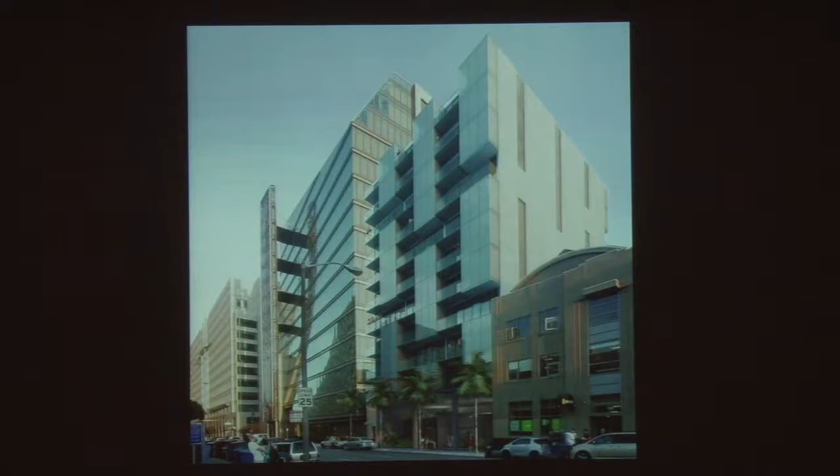At 555 Golden Gate, next to the new PUC building, a white San Francisco high-rise with a garden at grade to commemorate Stars, the famous restaurant that once occupied the site.

Amongst the wedding cake fabric of the Van Ness corridor, 1080 Sutter continues the grain.

On Clara, a SoMa alley, a building which bends to let southern light penetrate.

In Dogpatch, with its big industrial fabric, a small building of pleated bays, both singular and differentiated, which looks away from 3rd Street and opens to the bay.

In the Mission, completing a corner, with the prescribed rear yard incised on the perimeter as a series of courts which increase light exposure.

On Polk Street, punctured windows become projecting balconies.

This urban fabric type, sometimes warehouse, sometimes factory, sometimes loft, now mostly tech startup, is modernized using the same pragmatic structural principles with contemporary materials and means.

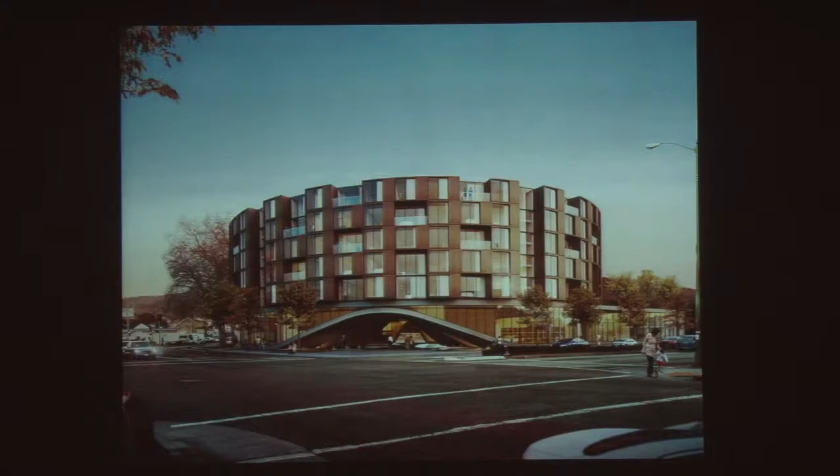In Oakland, a roundabout resolving the radiating avenues in a big O.

In Toronto, a modern city of glass towers.

The tropical modernism of Miami Beach, reinvigorated on two blocks for Waves at 600 Alton Road, with an outdoor shopping court within.

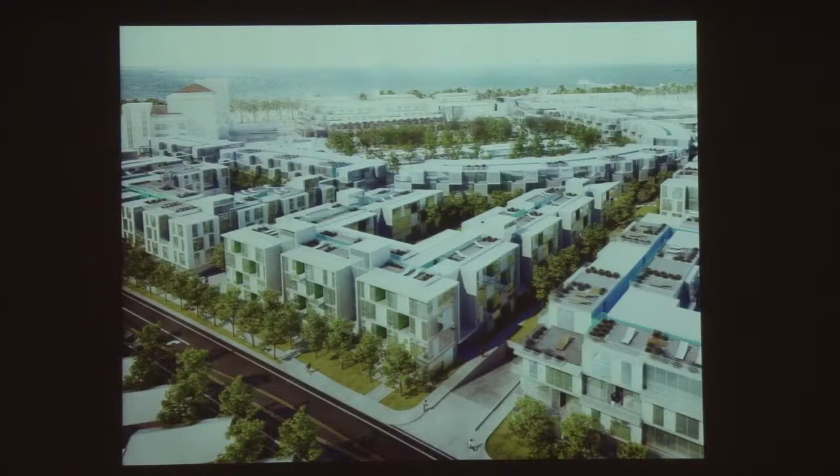Pacific City in Huntington Beach, a seaside town based on ocean Mediterranean instead of the ubiquitous Mission-style red tile roofs which originate in the hills, which are the sort of legislated style of Huntington Beach.

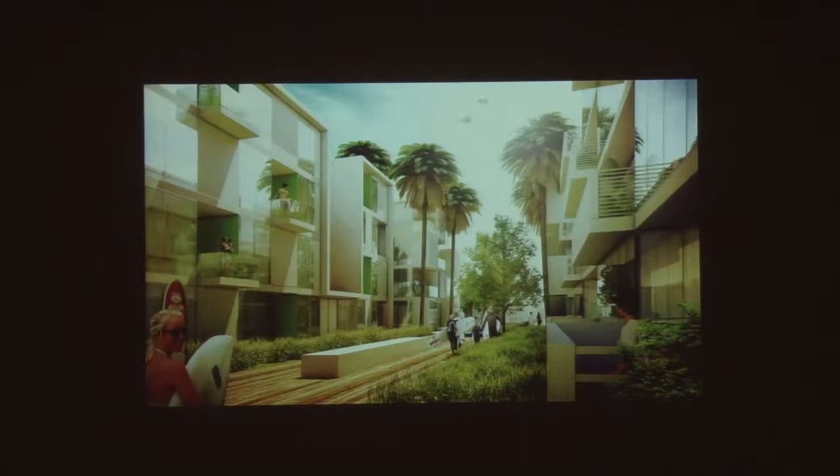But through an education process, I actually got this project entitled through the various bodies by explaining what ocean Mediterranean actually is. This is how we deal with the exteriors of our buildings, where the skin weaves the interior with a specific climate and particular culture of the city.

Our interiors emerge from another set of questions.

Many architects are interested in freedom of expression and design buildings as personal statements. My interest is rather in the freedom of expression of the occupants, in providing opportunities for the people who inhabit buildings.

This calls for forms that are open-ended and ambiguous, abstract and free of agenda, that express their own reality rather than artistic impulse. I'm interested in perceptible process, which is captured in the object and remains part of its experience, like forms in nature.

Architecture has legible intention, articulated in the accumulated language of form. This is sometimes structural, sometimes material, and always spatial.

In the search for the authentic over the image, the actual materials and the systems of assembly, the processes of construction, become the expression. I always see buildings as instruments more than objects, as receptacles for changing events in time, rather than static monuments in space.

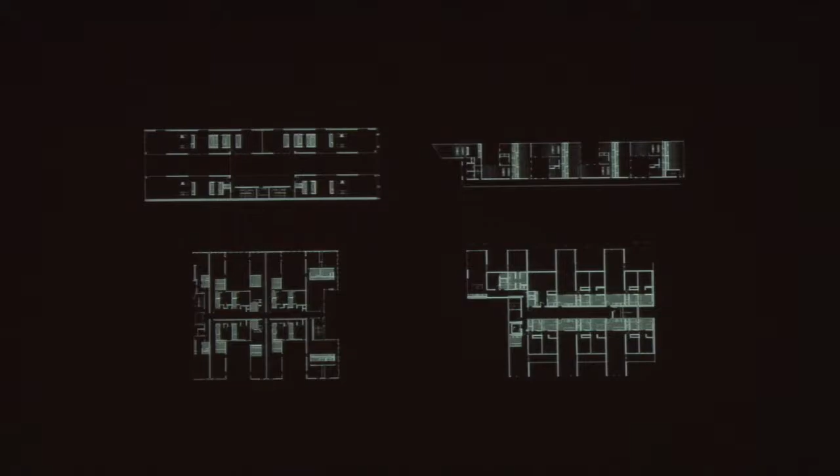I aim to make buildings that facilitate occupancy and appropriation, buildings which are frames rather than pictures, more like a telephone than a conversation, more like a camera than a photograph.

Our work emerges from highly modulated and systematic plans assembled from a catalogue of ideal contemporary types, which are constantly evolving. We use the lessons of mass production, and although there are claims that current technologies will bypass the need for repetition, we've employed the economies of serialization to increase quality.

We've never had any interest in arbitrary variety, preferring to make all units the same and good, and when inhabited, the neutral spaces we provide result in much more differentiation than I could ever imagine.

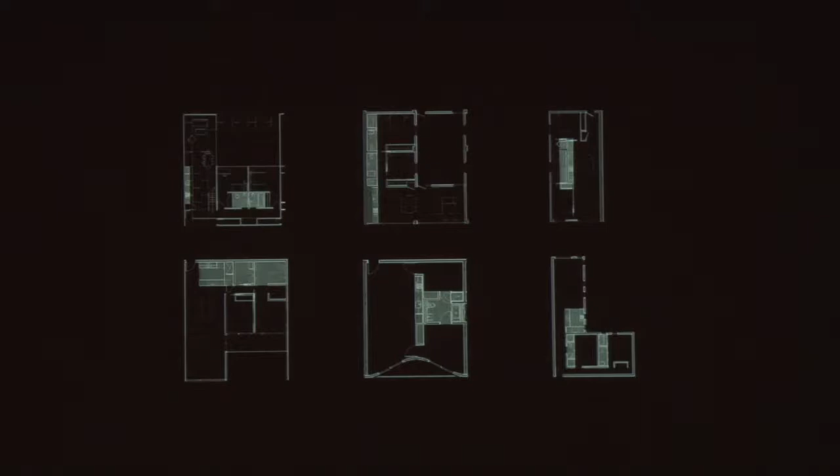In order to provide the maximum indeterminate, deprogrammed space, the service elements—kitchens, bathrooms, storage—are accumulated, collapsed, and minimized. These servant programs are compressed, eliminating the whole idea of rooms, replacing them with minimally differentiated continuous fields of space.

The service elements double as structure and stack vertically. All mechanical, electrical, plumbing, and sprinkler runs chase within these zones. All lighting emanates from these dense areas.

This process of reduction, compression, and repetition provides opportunities for the expansion and reallocation of resources to increase qualities in other elements. Through hierarchical unities, elements are assembled, grouped, and minimized, providing the maximum amount of free space for occupants to determine their own programs.

Buildings become instruments to facilitate rather than objects to admire. They exist in the dimension of time as much as the measure of space.

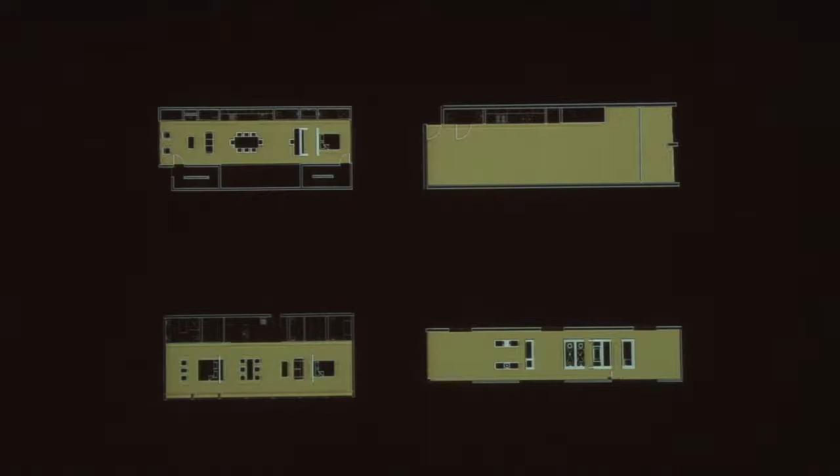From this strategy, we've developed two typical plan types, which we're using in many of our projects today. The first are what we call thickened walls, and the second, pods.

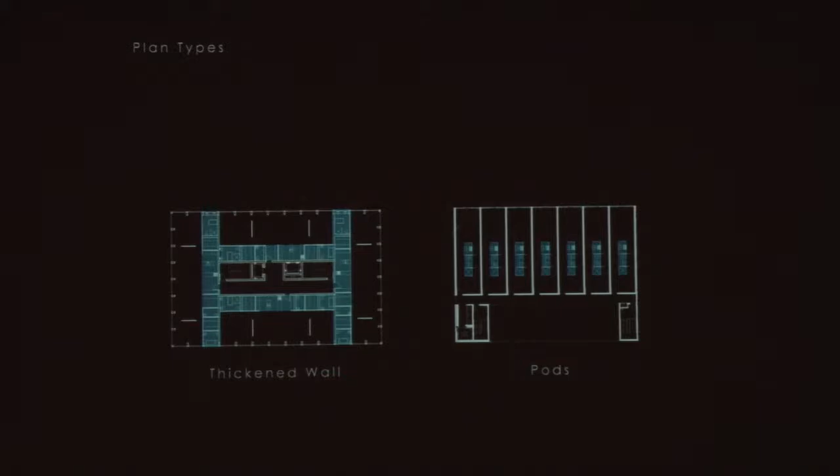These are some examples of thickened walls where all the mechanics and program have been collapsed into a zone—here a 4-foot zone, here an 8-foot zone, and here another 8-foot zone—leaving a free space which can be carved in a sort of indeterminate way through the process. Here you see the operation of this strategy where all the mechanics are in this zone, leaving this zone entirely free, and where the program is determined by the placing of furniture.

This is another example of the same idea of a thickened wall, and here the idea of buildings that exist in the dimension of time, where the master bedroom becomes connected almost in a loft-like way with the rest of the apartment through the sliding of these simple patio doors. And here are the bathroom elements.

Another example of this idea of thickened wall and free space in an 8-foot dimension with kitchen, washer, dryer, closet, and bathroom. And another example of a similar type of space.

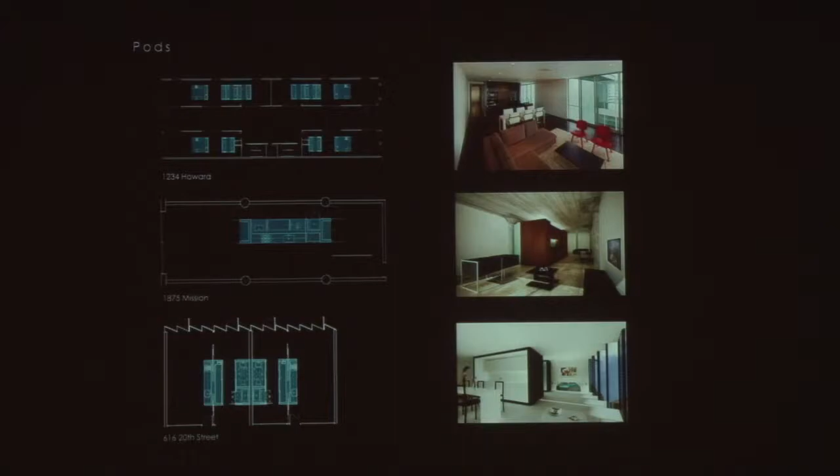This is a series of examples of how the pod idea has been interpreted. Here you see on one side of a pod floating in a field of space, a kitchen, and on the other side, a bathroom, which looks like this inside of it. Here a pod, which is a single element of furniture, is the entire mechanism of domestic life—a kitchen, storage, and a bathroom. And the location of this pod in this field of space creates opportunities for program like a bedroom, a dining room, and a living room.

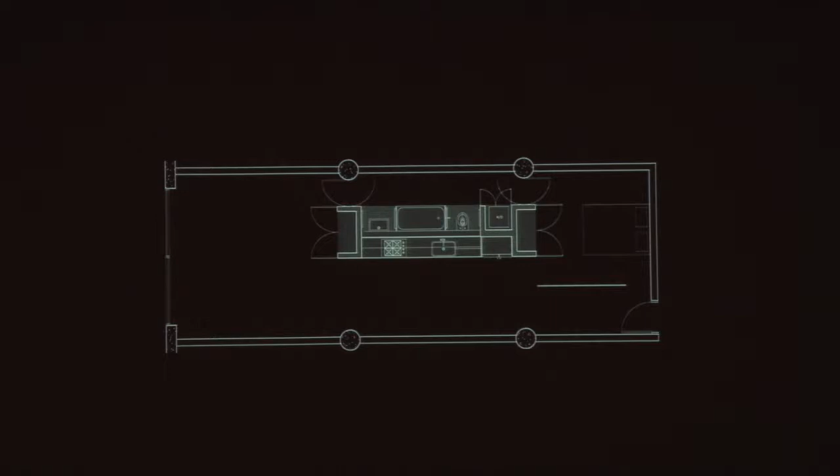And these, we're actually experimenting now in Cleveland with pre-manufacturing and slipping into a building like a piece of furniture. This is the bathroom side where the splash of the kitchen is glass, so you're getting daylight into this, which is often in dense housing conditions a dark sort of element.

And here you can see the same pod idea in a project in San Francisco, and here the opening of this field of space into a single kind of loft, or the shutting down into a two-bedroom apartment. And again, the opening and closing of this.

This is standing inside the bathroom area of the pod, closing the door, and someone walks by in the bedroom. Here the bathroom opens and the accessible part of the bathroom is shared. The turning radius of the accessible part of the bathroom is also a passage, and then closing it again.

So with that as the background of the work, I wanted to show you a few specific projects from recent work. This is 8 Octavia, which is at a really interesting moment of arrival in San Francisco, where the 101 ends and becomes part of the city grid—this is Octavia Boulevard. So this project is in a way a gateway, an entry point to the city, and it was important for me to think about the way this could introduce people to the San Francisco of today, the San Francisco that's more about the iPhone than the Victorian.

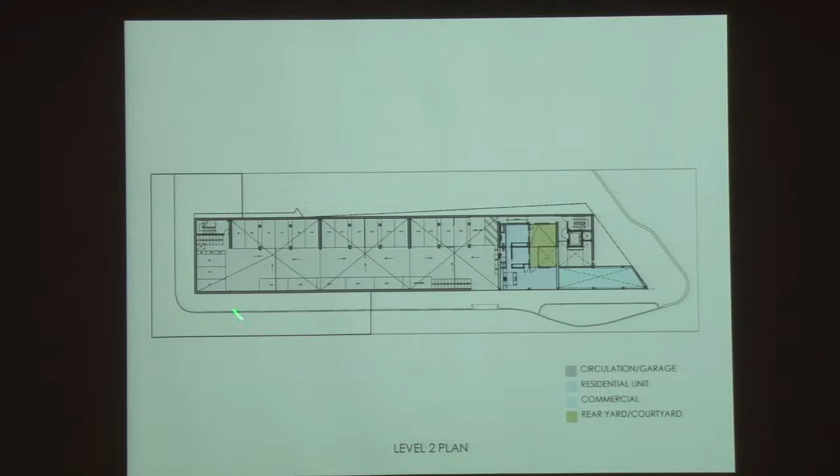And then the building, as you arrive in the hallways, and the sort of structuring of the building with these L-shaped units and I-shaped units. This is the thickened wall type, this the pod type.

And the way that then these wrap around these courtyards and then flip-flop to create a series of outdoor spaces, rooftops, and a kind of more complex idea of a vertical yard. And then again, flip-flop again, and then end up on the roof. So these are those slits that are the rear yard that are folded through the building.

This is a typical two-bedroom unit with this whole set of mechanisms compacted into the most finite zone, and this being a much more open-ended and interpretable area of space. And that's the presence of that unit, the dining area, the kitchen, the thickened wall with bathroom and storage, and then the way that this wall operates as a sort of machine to become an instrument.

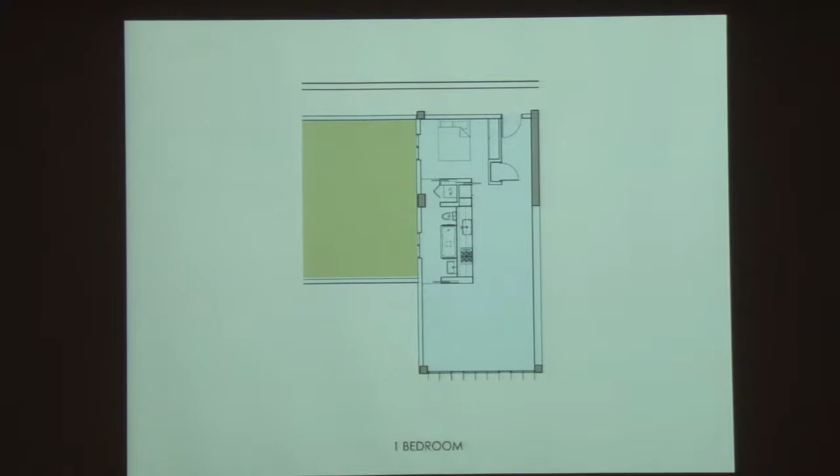Here the pod element, and here you see the pod, which is conceived as a piece of furniture, but was actually site constructed in this particular case. And the way that it appears from the bedroom side.

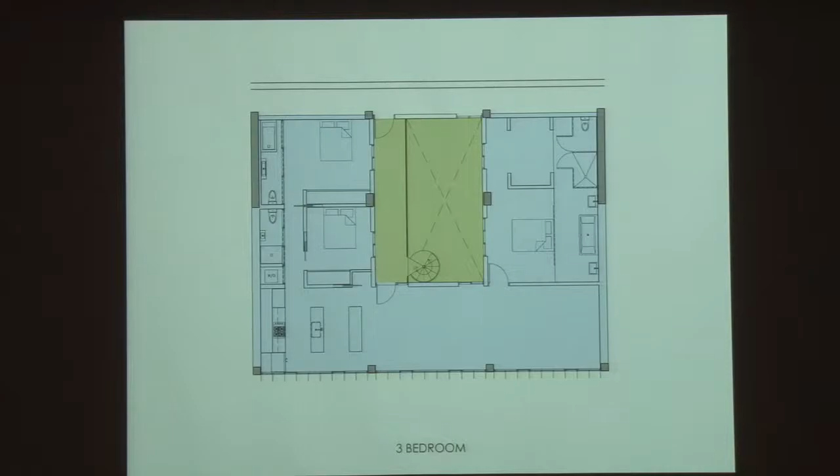These are just some of the other units, and at the top of the building, these three-story units which take the two building blocks of the L and the I and unify them into a sort of great room, a master suite, and then the standard two bedrooms, and have their own rooftop access through these spiral stairs.

This is one of those units. It's a 54-foot long room, and the master bedroom where the bed would go over here with the bathroom arrayed behind this glass screen, and the dressing area over there.

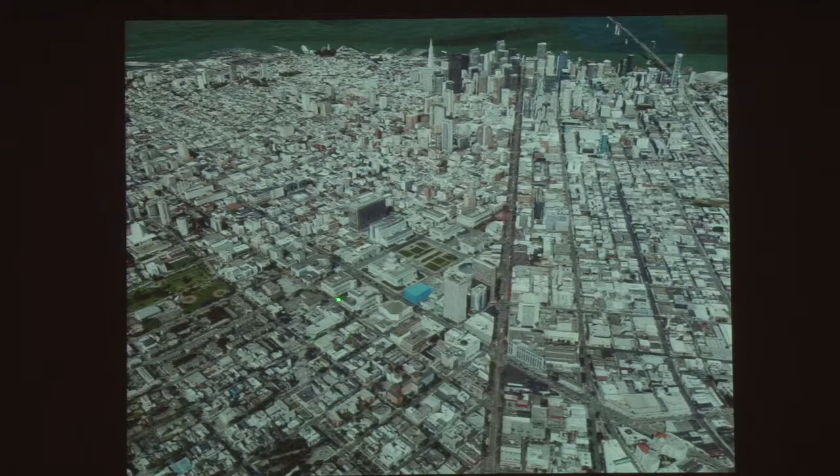This is a site in the Civic Center area of San Francisco, which is probably the most architectural moment of the city, where all these beautiful Beaux-Arts buildings cluster around a park. And so quite a challenging opportunity to build in the presence of such strong architectural influence.

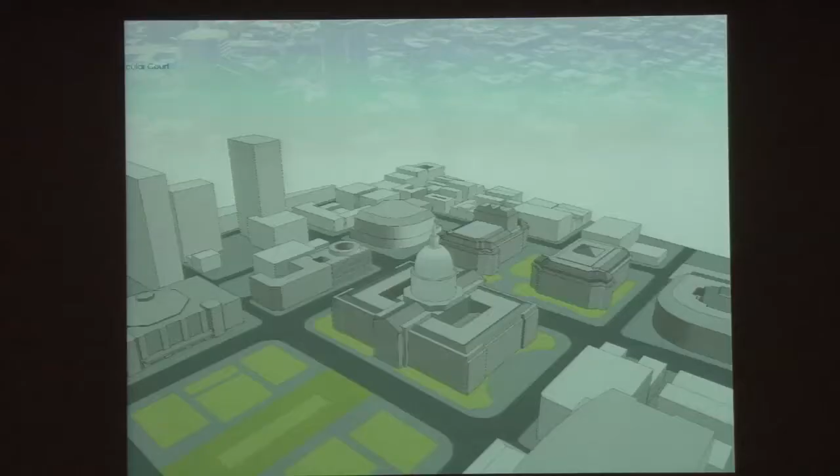One of the early observations was that all of these buildings are actually arranged around quite strong central courts. So I decided to use the same organizational device for my building. And because, again, there's this requirement of a rear yard, this is essentially the rear yard of the building, which is open to the sky and which the building is organized around.

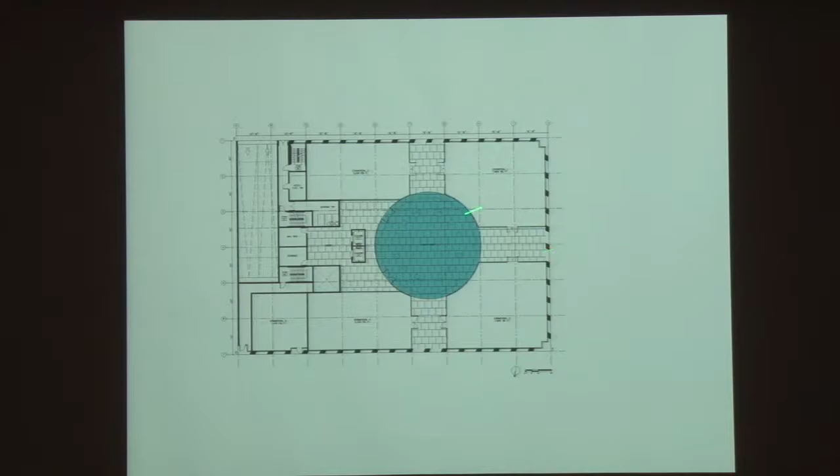So this is the plan of City Hall, and then this is the plan of my project at ground level with a cross-axis and a series of commercial spaces. The dome of City Hall and the rear yard of my building, where this is the access corridors to the units themselves, and it's open to the sky.

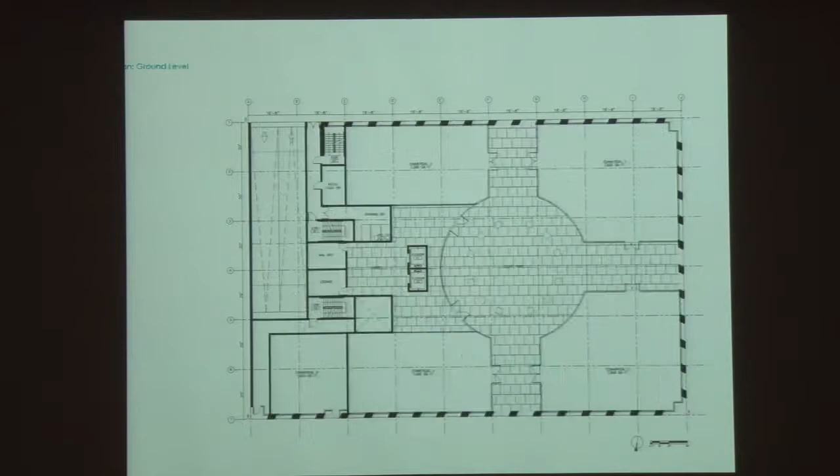So a very cautious and careful analysis of all the elements of these buildings to try to create something which is both of our time and respectful of the world that it finds itself in.

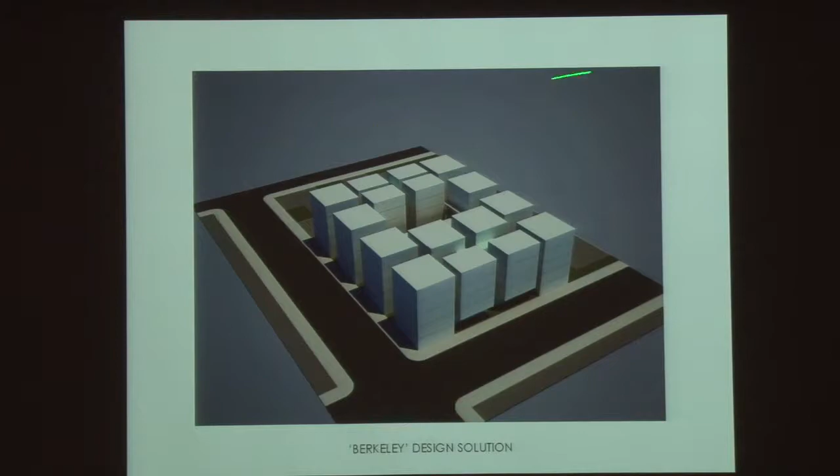So my approach was instead to do what we ended up calling the garden village, which is a series of buildings linked by outdoor space in a continuous green setting. This is actually a pre-manufactured modular project, and believe it or not, it's actually being made. I know these things have been dreams for the last 100 years, but we are actually doing this. So there are two modules.

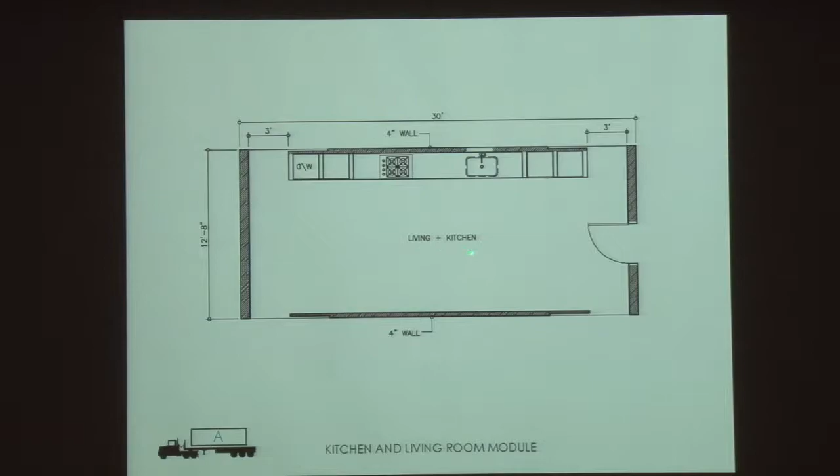This is the A module, which is basically living room, dining room, kitchen, and this is the B module, which is a bathroom and 2 bedrooms. So the standard 4-bedroom student unit is an accumulation of 1 A module and 2 B modules, which are slid together and then stacked on top of each other and around the site.

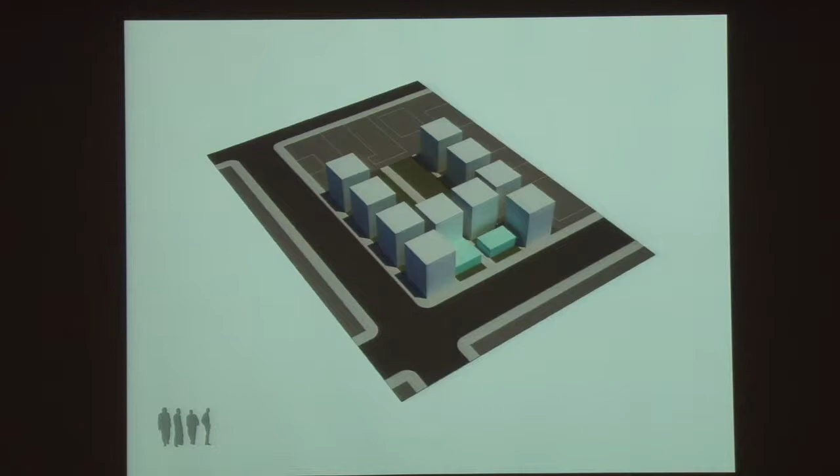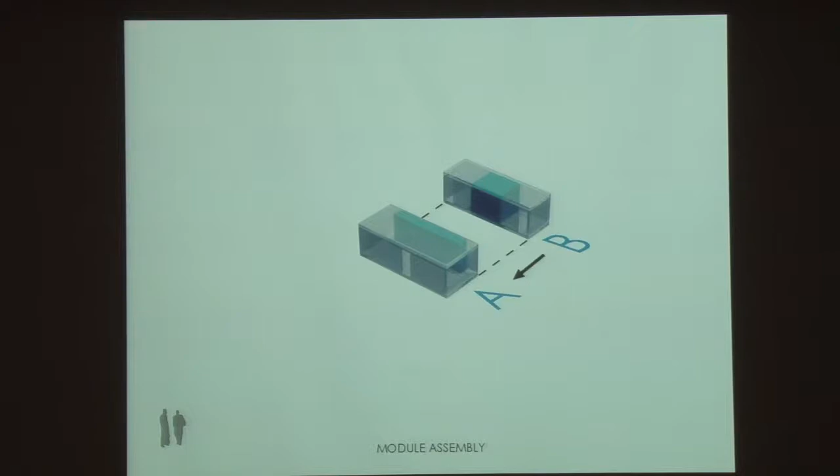And then we also have some more luxurious units, which are basically 2-bedroom units, one A module and one B module put together, then stacked in the same way to fill out the rest of the site.

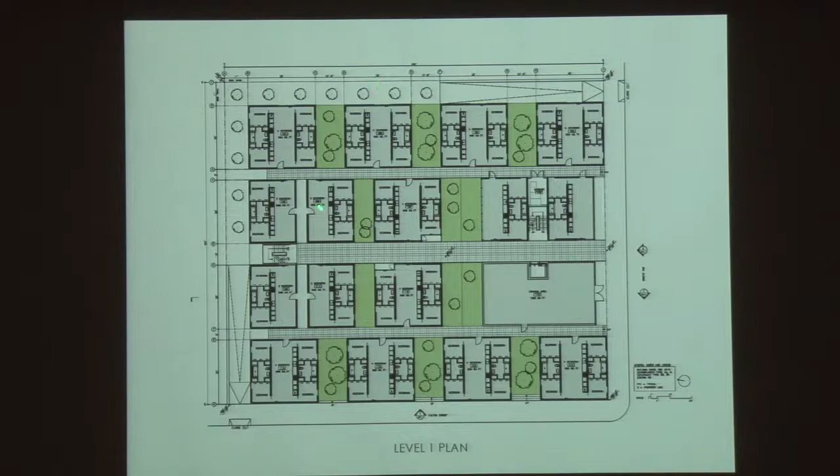Then there's an independent walkway system which links all of these little towers together, made out of bar grating. And here you see the site plan, so you see how the texture of Berkeley is maintained, and the idea of a village where it serves 2 purposes. One is to provide enough exterior girth to have light for all these bedrooms, which student housing demands. The other is to create buffers for sound and also to create this sense of living in a village.

And so these are the plans as you go up. This is the texture of Garden Village and the texture of Berkeley, so that it's quite continuous with the fabric of the town, and just some views of it as you drive up Dwight and as you come down Fulton Street.

And just the idea of these open walkways, which are the access to the towers of student houses, and the character of this village, which have these green spaces and connective tissue for student life. This is a rooftop outdoor area, which is a common area for the project, and one of the gardens, and just again views of the street.

This is the factory in Lathrop where the modules are being made, and it's a wonderful process actually, because unlike construction, this is a manufactured product. So there's no dirt and waste, and the labor that actually produces these buildings doesn't necessarily have to be skilled construction workers. The workers are essentially people who know how to make things. So it's a manufacturing process versus a construction process. It's sort of cleaner than the garage where I take my car. And so this is actually how these things are being made.

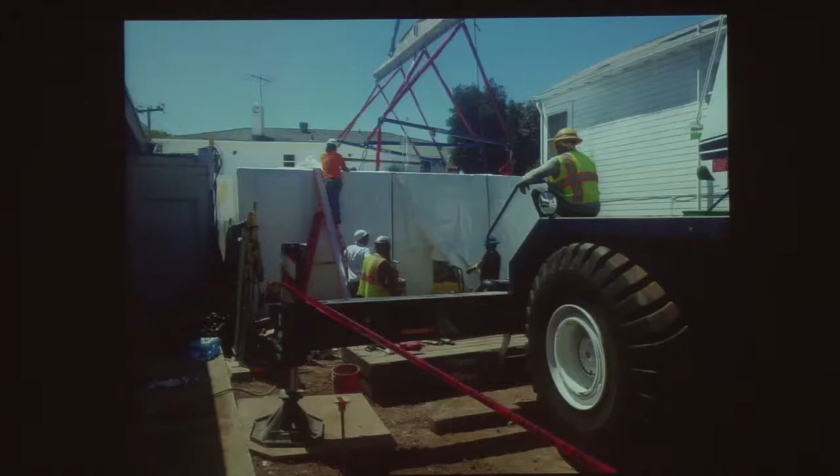This is a prototype that we built in Oakland to test the sort of difficulties there are in building buildings with very large pieces like this. So here you see the modules being stacked, and here you see the building finished. It's 5 units of this type.

This is the way the modules arrive from the factory. All you need to do is go to the grocery store and stock up the fridge, and you're ready to go. Or just put your towels on. The tiling, everything's done in the factory, and it's really nice quality as well. So it's quite an amazing operation.

And so here we are at Dwight. The site's been demolished. The basement, which is for the mechanical systems, is under construction, and the modules are being produced in the factory and will arrive soon.

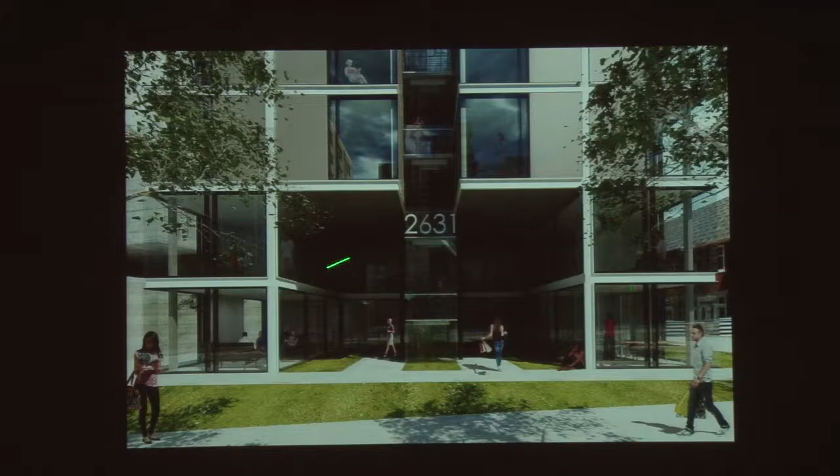Up the street in Berkeley, I'm working on a project next to the University Art Museum, on this site over here. Again, student housing, and the sort of main public gesture is this porch, which is a semi-public element. There's a lounge for the students and a management office.

The concept for the project was pretty much the idea of inventing an urban architecture which would create a kind of district architecture, modeled on great cities like Paris and London.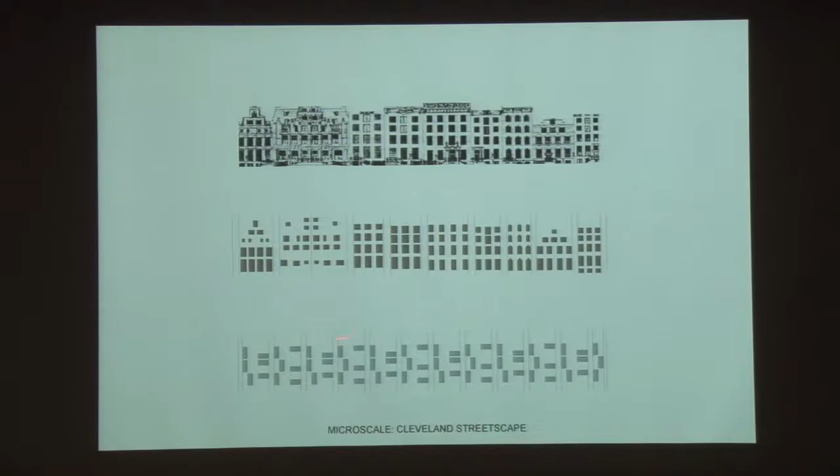So we began with a kind of analysis of the fabric of the downtown architecture and also the neighborhood architecture that's in the direct area of our site, and eventually developed a language for the exteriors of our buildings, which you see over here, which is a combination of an idea about a townhouse, the continuous fabric building.

So this is the sort of result of the architectural language that we invented, and the way that the language is a continuation and interpretation of the historic condition. This is the kind of threading of existing fabric together, existing street structure.

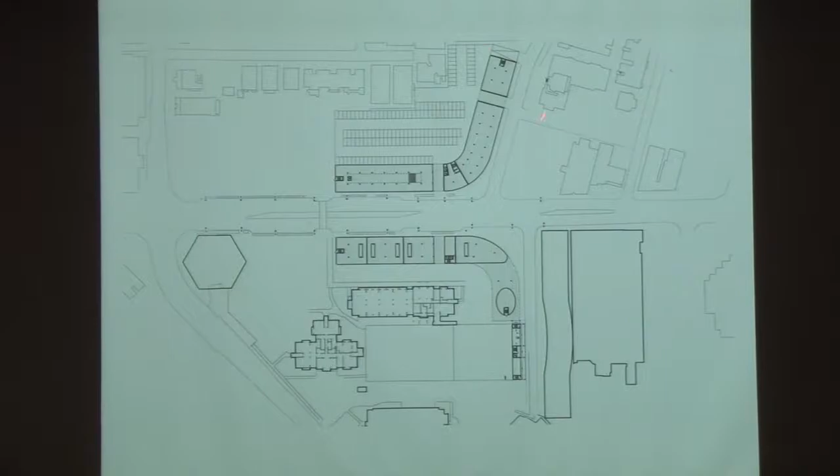The project is based on a sort of thickened wall idea with these continuous service zones and a double-loaded corridor, and then these continuous free zones which are carved up in different ways.

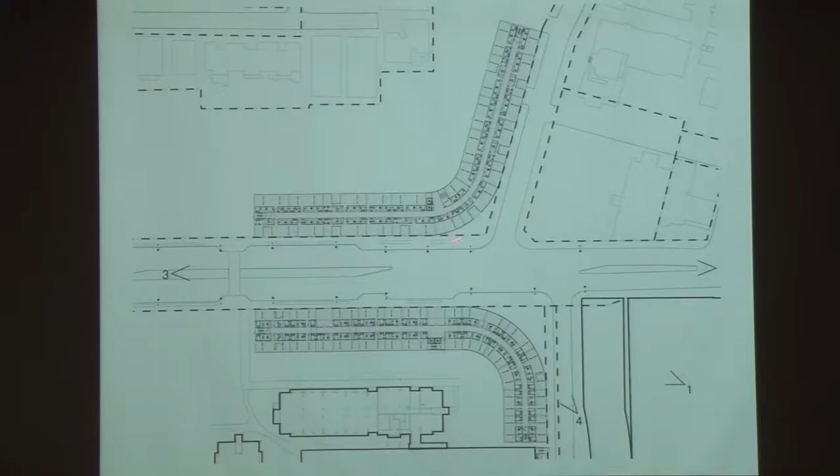This building carved into smaller units to house mainly a student population, and this building more market rate population for Case University. These are for Cleveland Clinic.

These are the different unit types, but there are quite a few more. But I mean, it just shows you the general strategy, and I'll show you more about that.

So this is then the sort of threading and weaving of existing and new, and the sort of creation of this town, uptown. This is phase 2 now.

The success of phase 1 gave everyone confidence to double the scale in phase 2, and phase 3 and 4 will be even bigger. So I was stuck with a difficult problem because I'd already built these buildings, and I had to figure out a way to both double them and continue them. So this is the result of that.

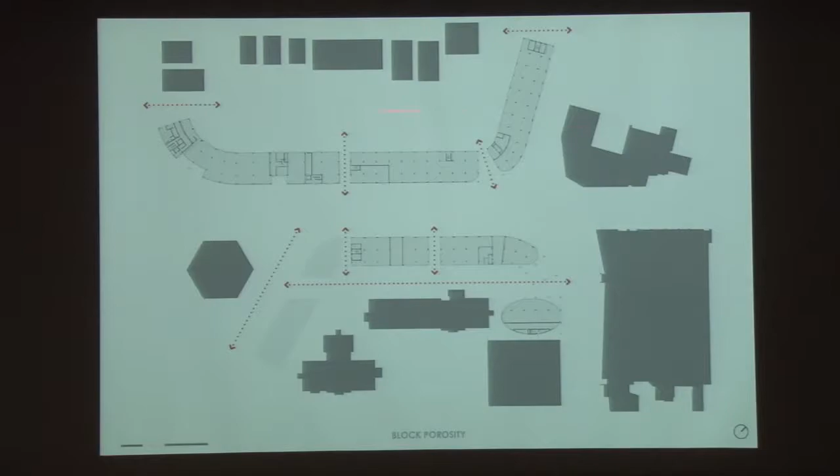And this sort of concept of gateways which connect through. We also made a hole in this existing building to connect to this parking lot and this courtyard behind here. So this threads through from our building to the rear yard and a residential neighborhood. This is a link between the two art institutions and so on. So these were the key things, this sort of urban idea.

The whole ground of the building is both transparent but also glass, so that it creates a sort of sense of floating, open publicness. And then there are the gateways, which do actually link through in various places.

These are semi-public areas in the buildings themselves, which are sort of eyes on the street as well as gathering places. I'll show you something of them.

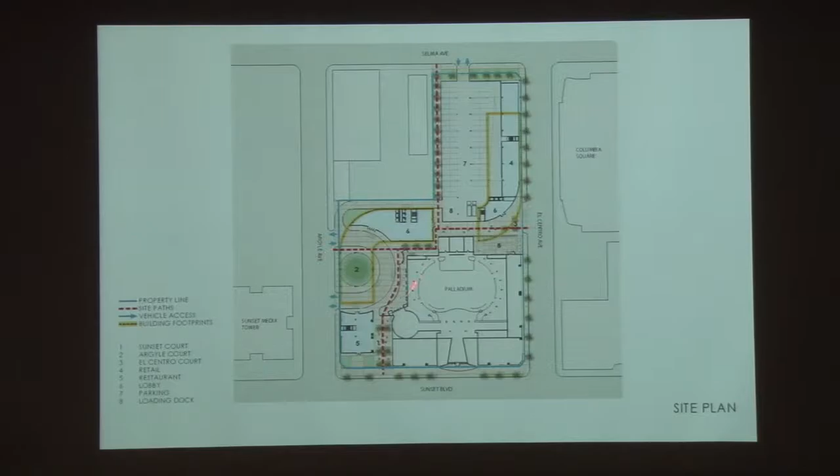So here you see the sort of construction of an urban precinct in a parking lot. This building today floats with cars all around it, and this is a creation of a precinct for it with a courtyard, another courtyard, and the entries, and a major automotive arrival point around the existing canopy.

Oh no, that's which way?

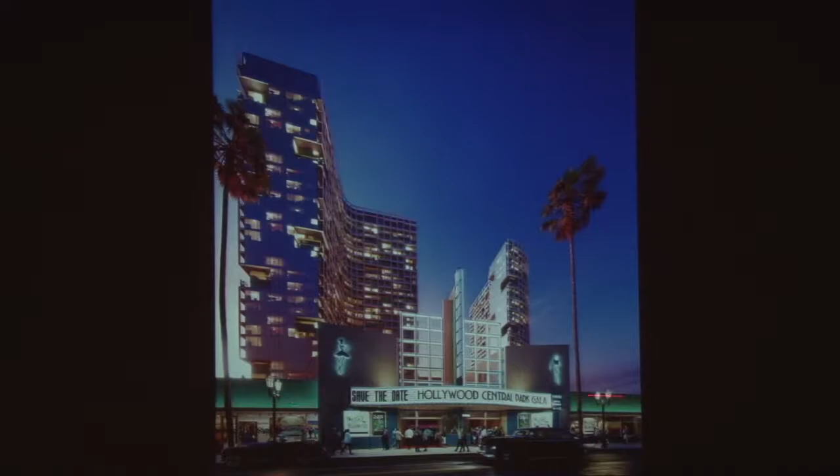So these are just some of the images. This is again the same strategy of thickened walls and different unit types, with images of this lattice work of balconies and screening that becomes the front of the building, and views of the old and new—a recreation of a more intense, dense urban life that will reinvigorate what's a little seedy right now, as it is today.

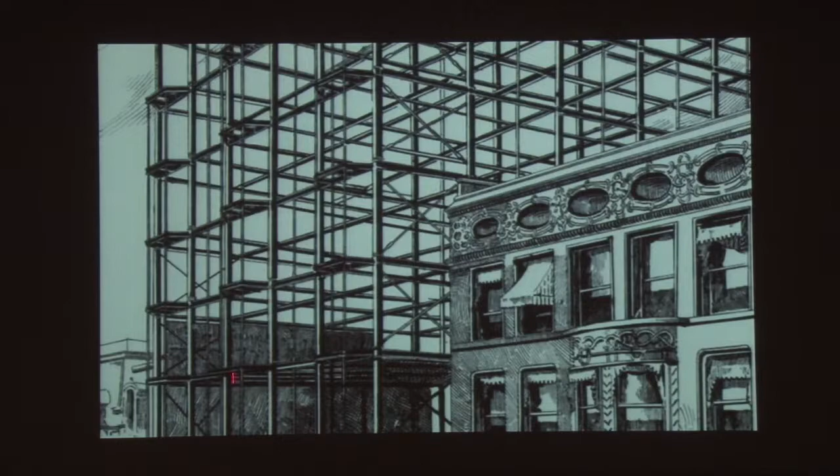This is Chicago, and working in Chicago is an amazing opportunity because it's the city where modernism was actually invented. It's almost like what Florence is for the Renaissance, Chicago is for modernism. It's a city of grids both horizontally and vertically, where the frame was first developed as a pragmatic way to stack things, but later by people like Mies was turned into a form of architectural expression and a language.

So the idea for the building was really a palimpsest, to create an object which would somehow collapse all of this history into a single building. This was the operation of building it out of the history and lessons of Chicago. Here you see the building—it's at the corner of Roosevelt and Michigan, on the South Side, at the opposite end of Grant Park, a kind of bookend to this amazing open space.

One of the interests I had very early on in Chicago, after looking at Aqua with its nice Miami-type balconies that are just thrown out into the wind, was to make a building that would actually be usable in that climate.

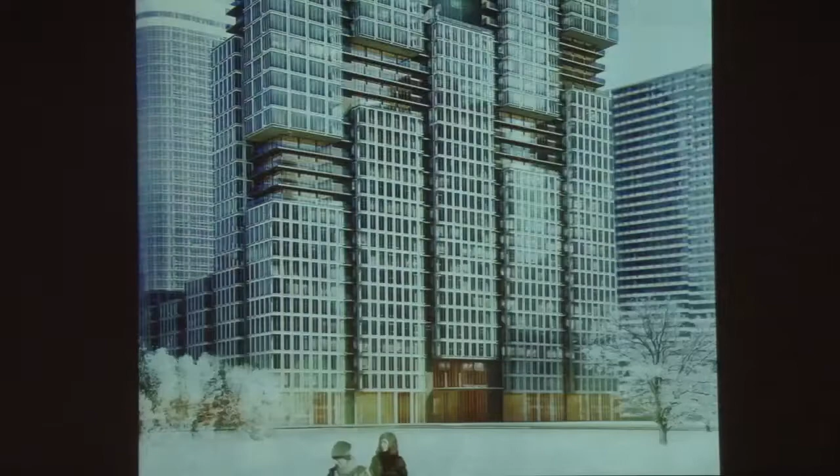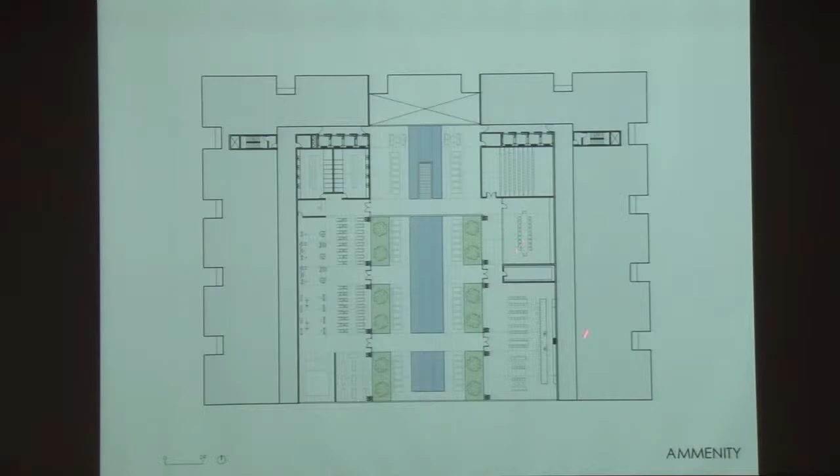So this is the entry to the building, where you walk into a sort of vertical lake and walk through the lake to a massive amenity zone, which is almost like a resort.

Here you see all of the vertical distribution of the building, the elevators and stairs. This is all the wet services of the building. This is all the indeterminate space, and these are the recessed balconies—it's very rigorously based on the same traditions.

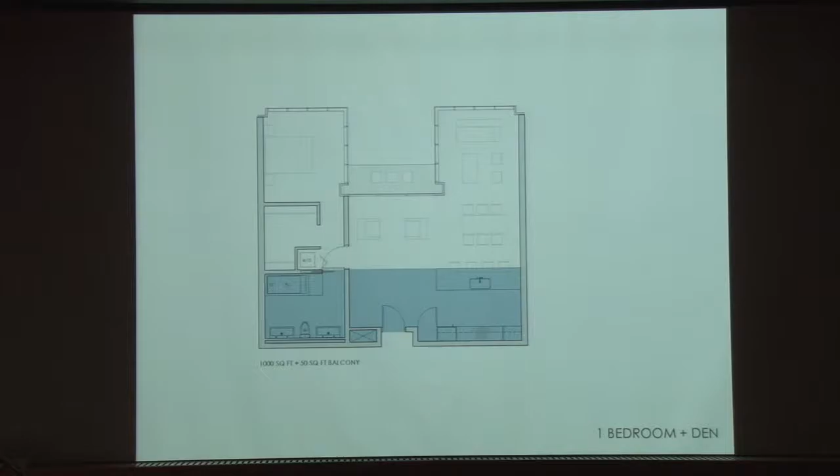Here you see the way the system actually works to make decisions about different types of units. One of the things that's always difficult with development is finding the right mix, and often it has to get deferred quite late in the project. This method of systemic rigor allows that to be done late in the game.

And this is just some views of the building.

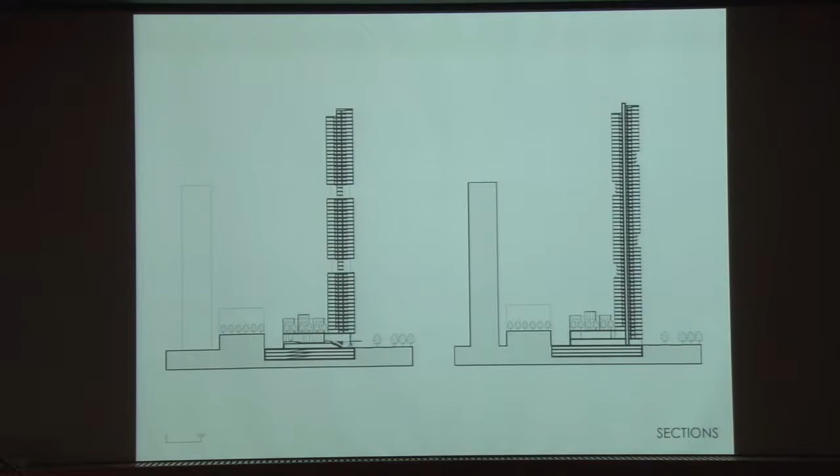I wanted to show a few of the other project types that we're working on. Like most small offices, we began with single-family houses, and it's something we're still engaged in.

This is a house in San Anselmo for one of the people from Apple. It was a really complicated site with sloping areas right at the end of the development of Sleepy Hollow. The only way that seemed feasible to build on a site like this was to actually create our own site—so we built a bridge which contains the program of the house.

On the lower level are all the bedrooms, and on the upper level is a big loft-like family and formal area, plus a guest house and garage.

The site itself is quite intricate, with two scales—the village scale of Sleepy Hollow and then a big public land area—so the section actually accommodates and opens up to those places.

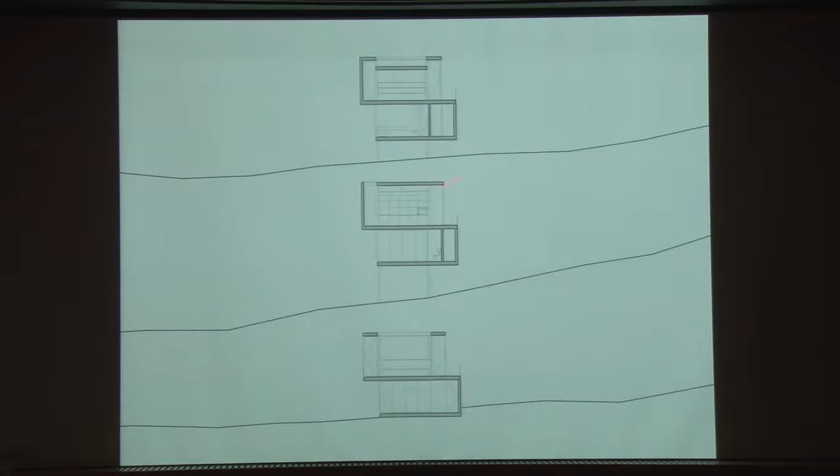So this is the bridge spanning across, creating a new kind of landscape for the house to occupy. This is the arrival into a courtyard, which then leads to the front door, and another courtyard which leads out at the other end to a swimming pool.

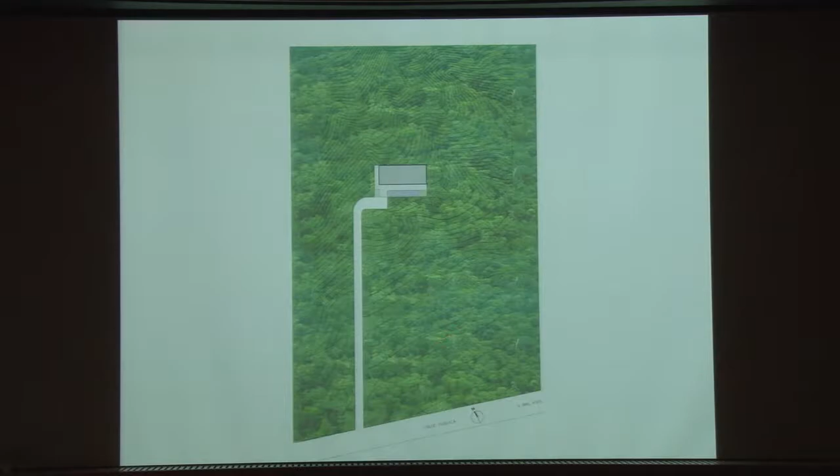This is a house in Costa Rica, basically a vacation house. When the occupants are in San Francisco, the house has to be shut down and secured very rigorously. It's in a beautiful jungle with wild fruit trees and monkeys swinging around—it's actually like a paradise. The house itself doesn't have any glazing.

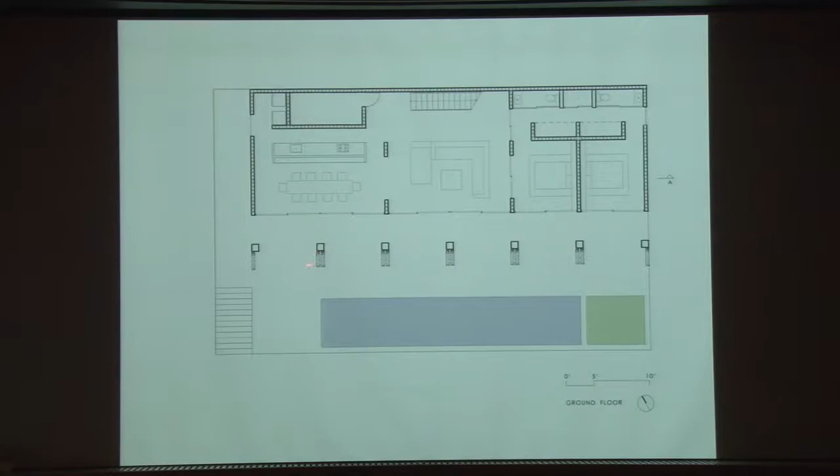There's a very interesting, different kind of technology used to build there—masonry and concrete, which I very much enjoyed working with, as well as steel fabricating, which was part of a tradition I saw all over in San Jose.

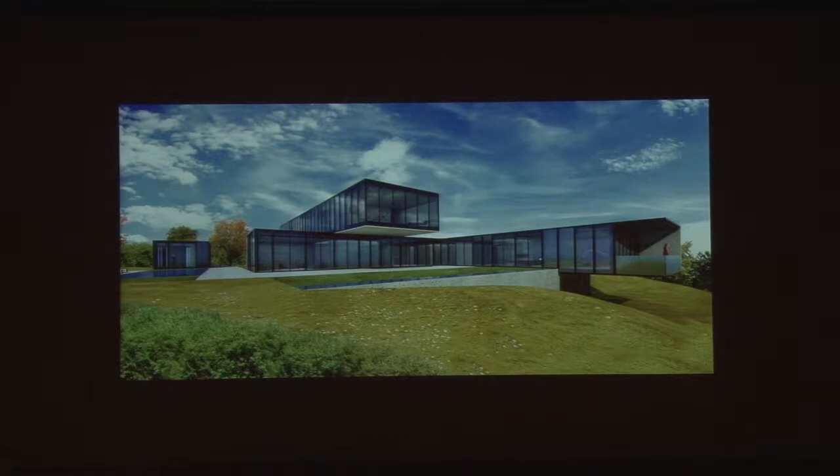This is a house under construction in Atherton. It's a 17,000 square foot house for some very low number Google people. The part that connects to the cul-de-sac, which is the arrival, is all pretty solid, and then the rest of the house is entirely glass and opens up to the views.

It's quite a beautiful site with amazing views of San Francisco, and it's basically oriented and pointing toward them. This is the arrival, and then the open part that looks at the views, and it stacks in the landscape like that. These are the main program elements: the garage, pool, and pool house, along with some views of the building.

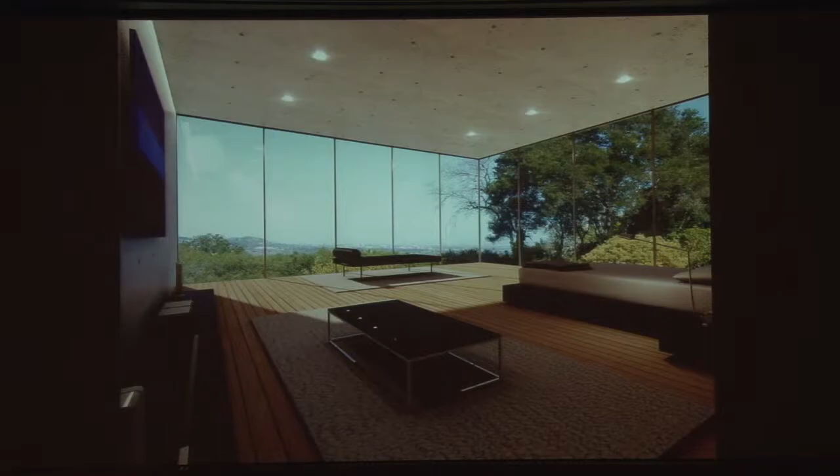It's all poured-in-place concrete, glass, and steel. This is a mock-up of the concrete—we have real concrete artists working with us. And this is the actual construction.

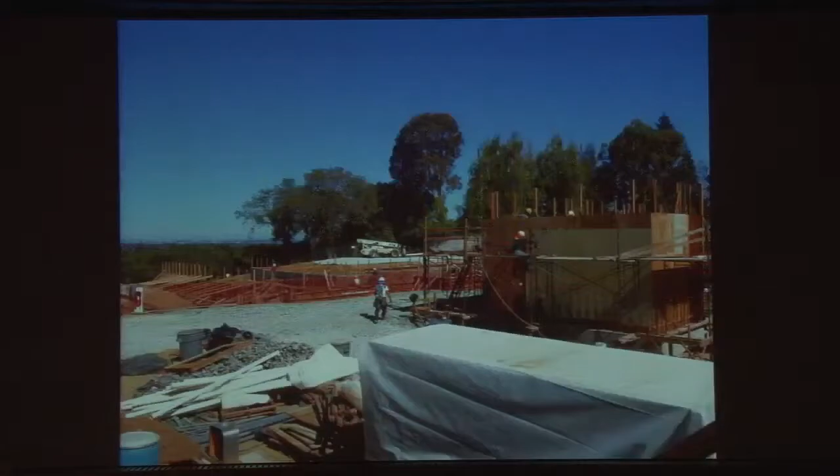This is a synagogue in San Francisco, for a conservative congregation. The most important aspect of conservative Judaism is that they've integrated the services for men and women. Traditionally, women didn't participate in the services, and the whole evolution of this design actually emerged from that fact.

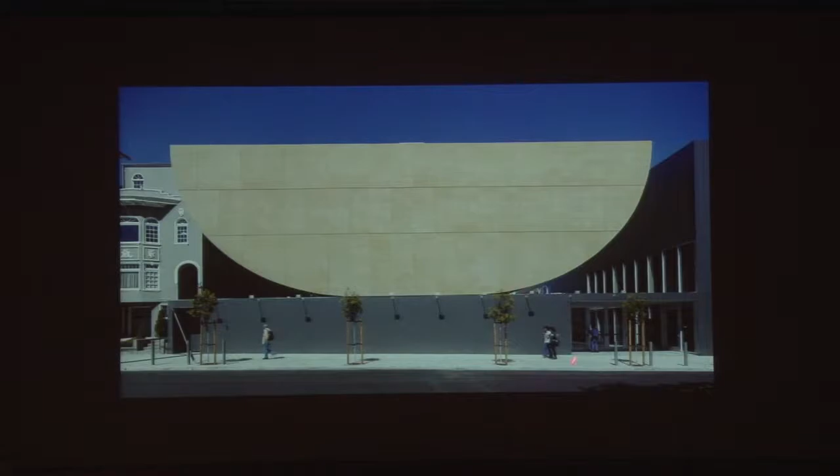Being in a city, the arrival and the transition into the building becomes very important. So it's pretty much cut off, with a series of courts that bring you to the worship space—a way of moving from the everyday to the more sacred. The exterior and the imagery is a memory of the most holy place for Jews, the Western Wall.

In Jerusalem—this is the arrival into a courtyard, up a staircase, where you look back at the city, and arrive in yet another courtyard which links the social hall, a school, and the sanctuary itself.

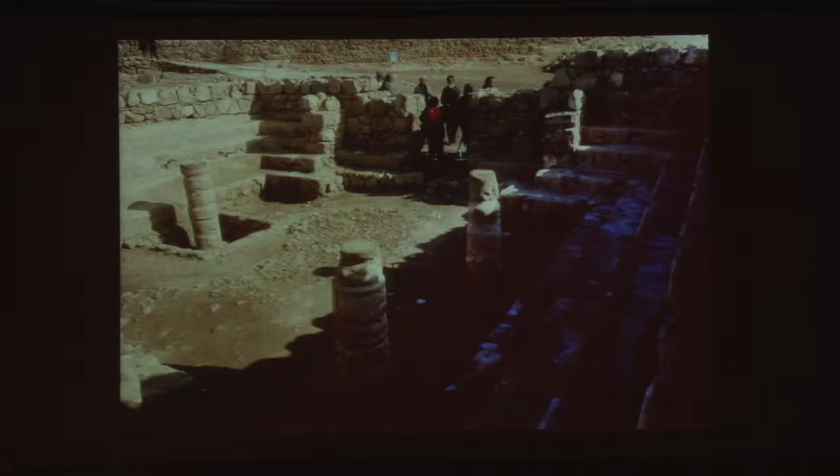The origins and beginning of thought for this building is actually from Masada, the most ancient synagogue, based on a Roman kind of format, and I used this as the starting point for the design.

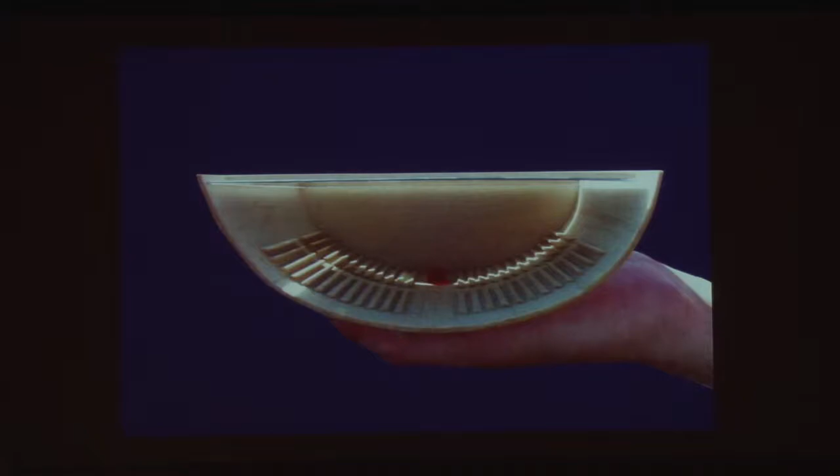So this is the bowl where traditionally women worshippers were in balconies and cut off, but here everyone's in a single space, all focused on the center, which is where the service is conducted—very much like the small ancient synagogues.

One of the interesting aspects of Judaism is that ornament is forbidden—it's basically considered idolatry. So the way the space is actually decorated is with light.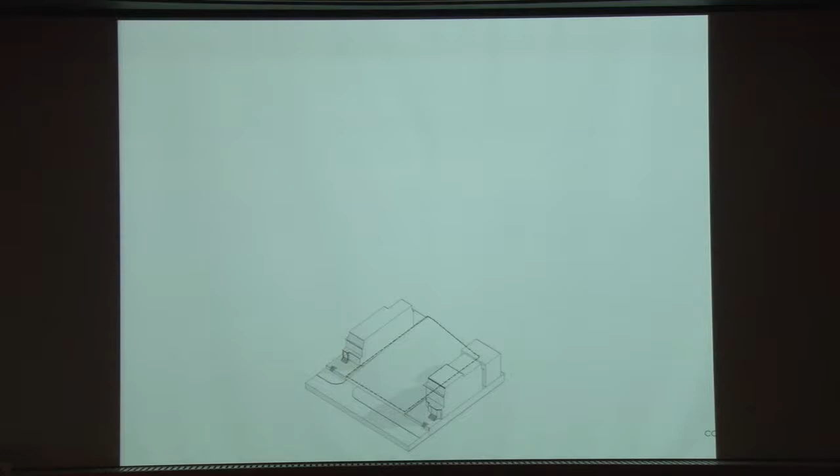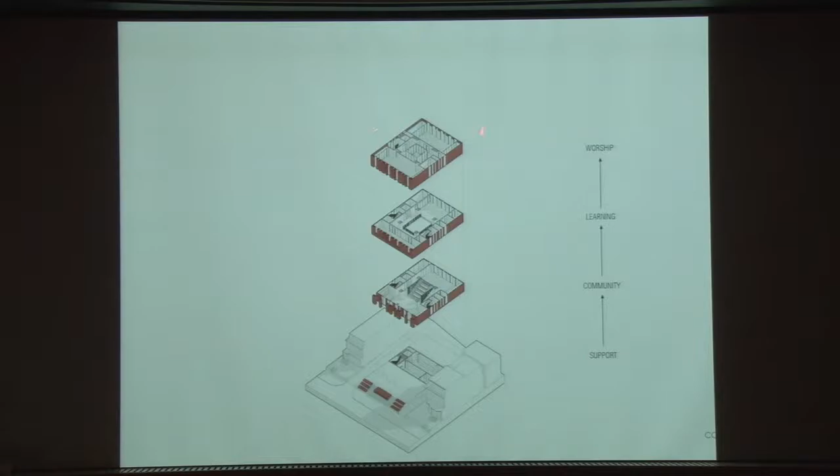The building's organized on the site with the basement as a zone of support, then the main floor, which is the community floor where all the meeting occurs, the next floor being a floor of teaching, and then the top being a worship space floor with all the different sanctuaries. So this is the support, kitchen and storage, the communal space at the center with a lounge, an amphitheater, and a dining space, and then the learning areas, which are classrooms, offices, and meeting rooms, and then 3 different synagogue spaces, one for Conservative, one for Orthodox, and one for Reform.

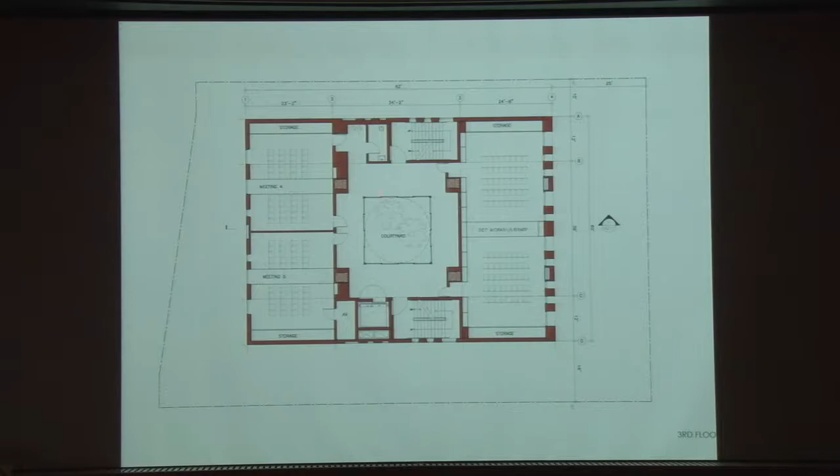Judaism has split into many branches these days, and all of them have very distinct differences. So my interest was in actually creating a space which would unify all of these people, which is this space here, which I'll show you later.

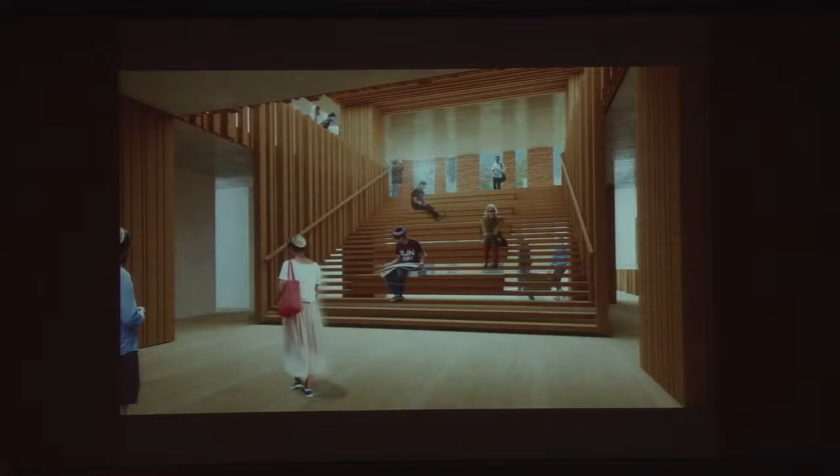This is the lounge when you arrive. This is a kind of meeting space, common space, staircase, courtyard that leads up from the community to the learning area. And this space has many uses—it can be a movie theater, it can be a synagogue on the high holidays.

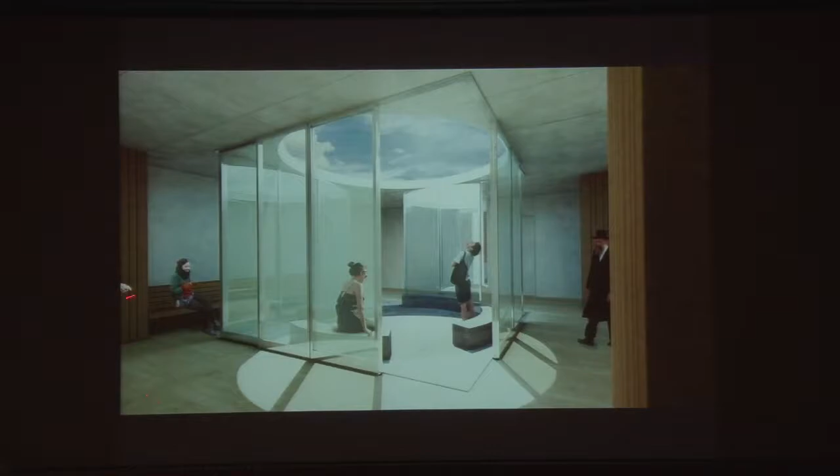Then the dining space, one of the synagogues, and the sort of central space, which is in a way a deconstructed or absent synagogue that unites the 3 different denominations into this common area, which none of them can possess.

In San Francisco, we're working with PG&E to do a series of new substations. These old substations were basically air-insulated and massive, and the new substations are gas-insulated and have the same sort of capacity, but are extremely miniature.

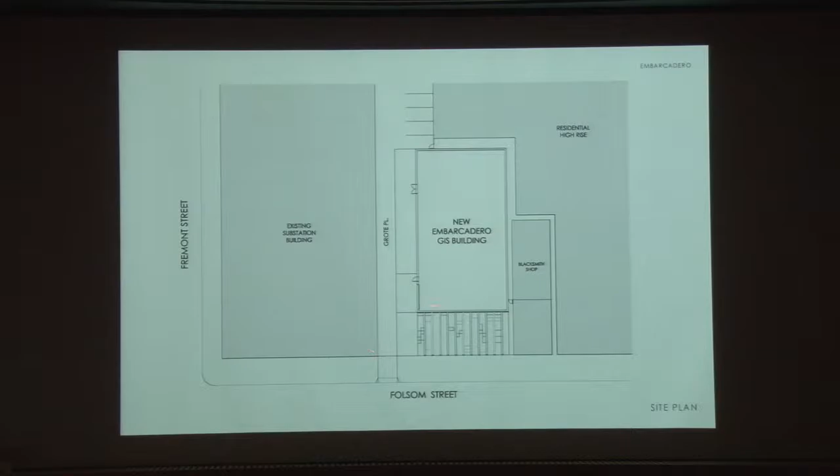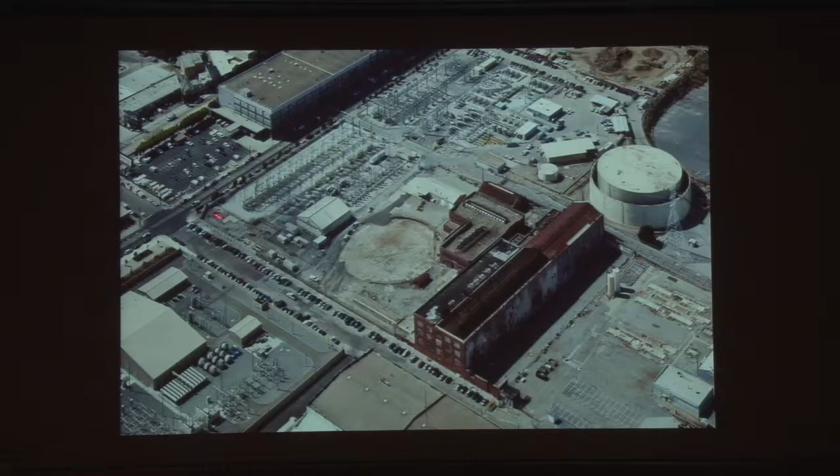So what we managed to persuade PG&E to do was to push them back from the main streets and create public plazas. This actually has the same electrical output, actually more electrical output than this, but they'll both coexist on the site. This is another site in Potrero where we're doing the same thing in this area here—this is all an old air-insulated substation, and then the new gas-insulated substation is over here.

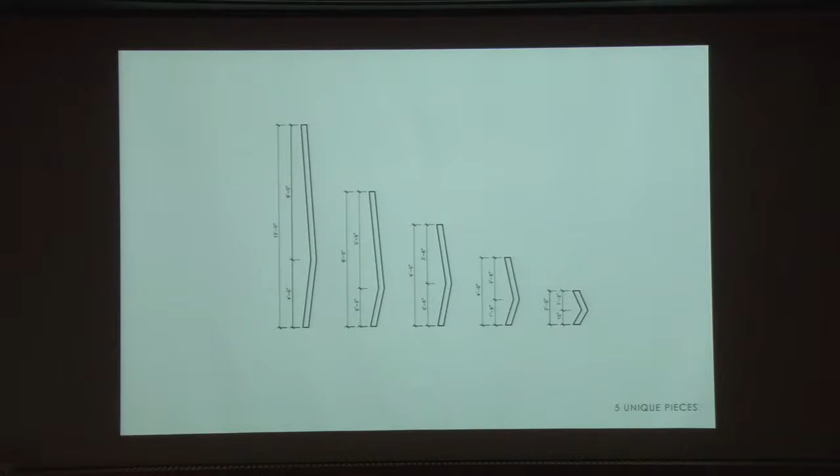So what we did was basically create a kind of kit of parts to wrap these substations and also to create the plazas. They're essentially 5 precast elements which are unique pieces that can be combined in 20 different derivations, and then are used to wrap the facades and transform into kind of habitable ground surfaces and furniture.

And the two sites have very different conditions. One's downtown with high-rises all around, the other is in the Potrero district near the bay. So we used the same elements vertically downtown and then horizontally at the water.

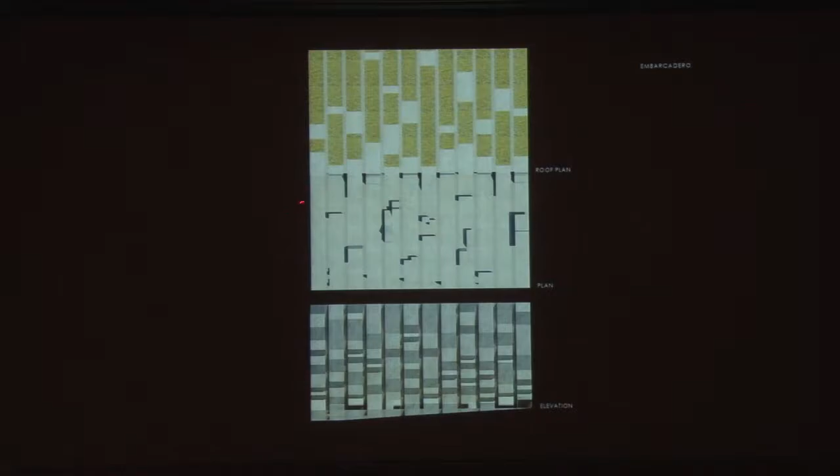So this is the Embarcadero site, which has visibility from all the high-rises beyond. There's a green roof, there's the plaza, and then the facade. These are the elements that wrap this building and the relationship to the existing building. And PG&E has plenty of electricity, but this is LED.

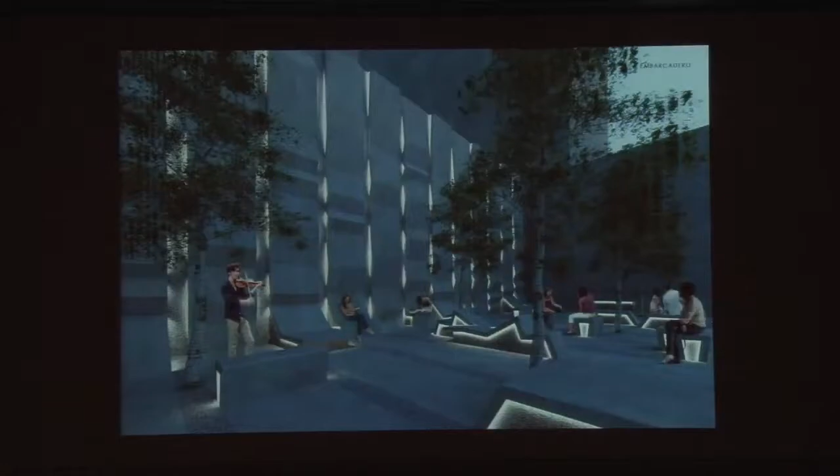These are the precast mock-ups and the lighting tests that are done. The buildings are under construction at the moment.

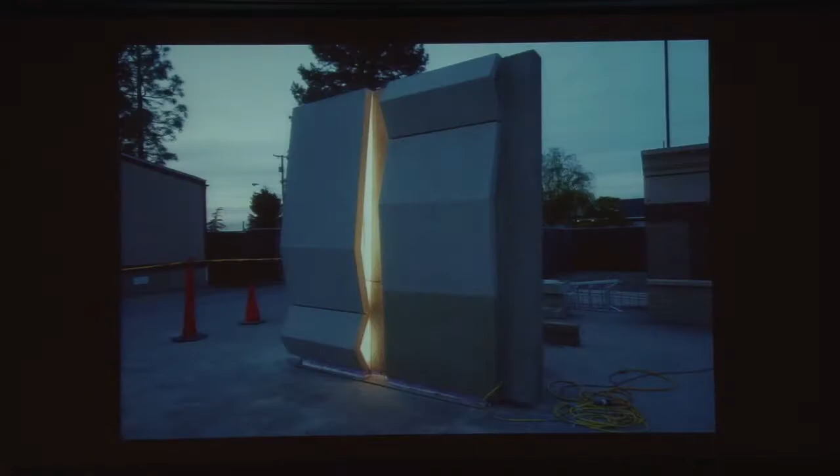The last project is the Tampa Museum of Art. The evolution of the art museum is an interesting project in architecture. I think the poles are pretty distinct between the idea of an art museum as a work of art in itself, a beautiful sculptural object, or the art museum as a kind of instrument and framework that allows the art itself to become the main part of the show.

So obviously this follows the second trajectory, and it's in a floodplain in Tampa, Florida, where the first 18 feet couldn't house any of the art programs. So there's a kind of glass pedestal on which this jewel box floats, and the jewel box then gets filled with the art.

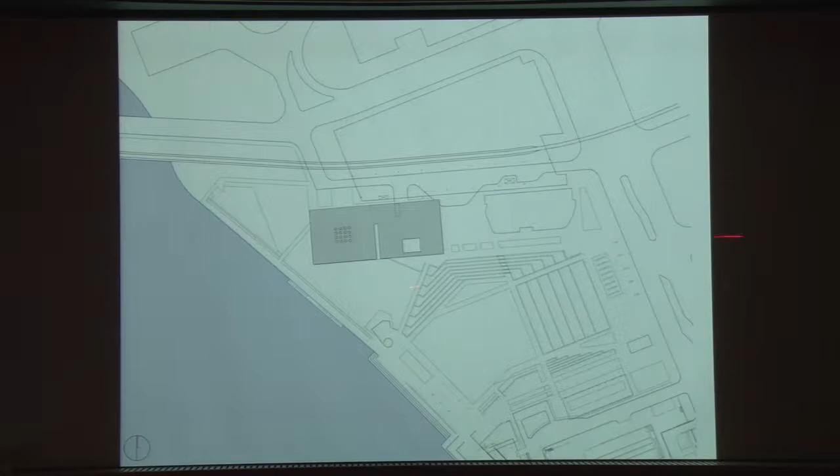This is the building over here. This is a famous Dan Kiley garden, and then this is a new park that has just been completed, and a children's museum.

So the interesting other aspect for me of art museums is that the collection of objects inherently means that you're going to run out of space, and every art museum that I know of gets added onto. But so many art museums are designed as sort of finite fixed objects that don't allow any future additions. So instead I worked with the idea of the museum building and set up an infrastructure where it would be very easy to continue adding onto the building.

And in fact, I think they're almost getting to a point where they might have to. It happens quite quickly too.

But anyway, then there was the question of what the building should look like. And of course, I didn't want it to look like anything, but I wanted it to work like nature. So there are two layers of perforated metal which are separated by six inches, which as you walk around create these moire patterns that are constantly flickering like water or sky. So it very much embraces the kind of world that it's in, as a kind of live object that doesn't actually have to do anything.

The curators of modern art museums don't want light or any kind of relationship to the exterior. They prefer neutrality and a controlled sort of world.

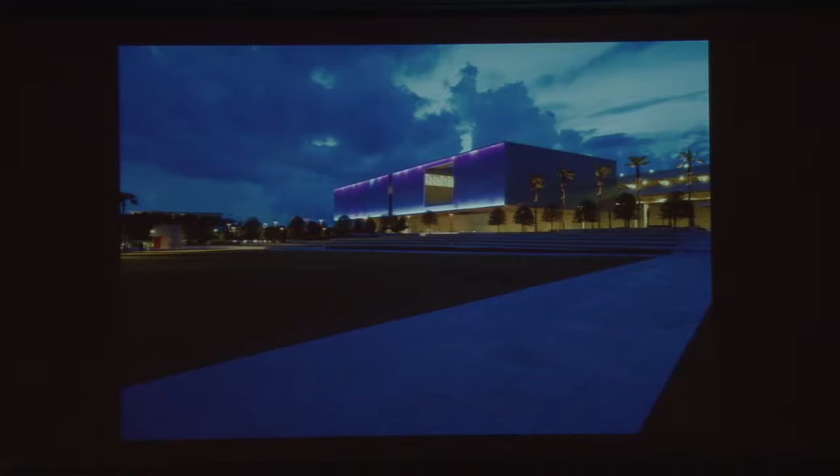I just wanted to end with one little thought, to go back to the beginning. Here you see the museum as a frame, an instrument rather than an object—open-ended, ambiguous, abstract, and free of agenda—expressing its own reality rather than artistic impulse, where the actual materials, systems of assembly, and process of construction are the expression. At a time when architecture is driven by novelty and spectacle, there's another much deeper foundation, ruled by evolution and refinement. My search is for new forms of expression which extend architecture's language and create expanded fields of freedom for its occupants. Thank you.